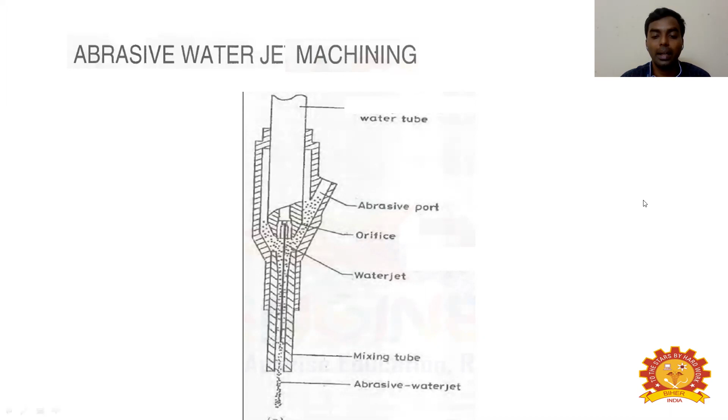The four important elements are: pumping system, abrasive feed system, abrasive jet nozzle, and catcher. These are the four important elements in abrasive water jet machining. Now we are going to study them one by one.

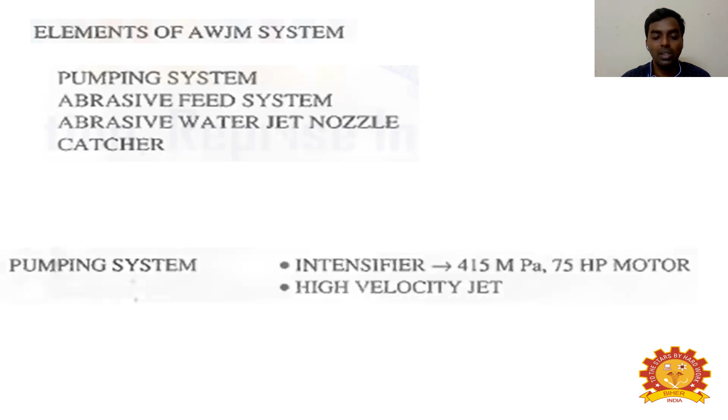The first one is the pumping system. The name itself indicates a pump, which we use to transfer fluid from one place to another.

It produces a high velocity water jet by pressurizing the water as high as 415 megapascal by means of an intensifier. To achieve such high pressure, 75 horsepower motors may be required. So water flow requirements up to 3 gallons per minute are quite common.

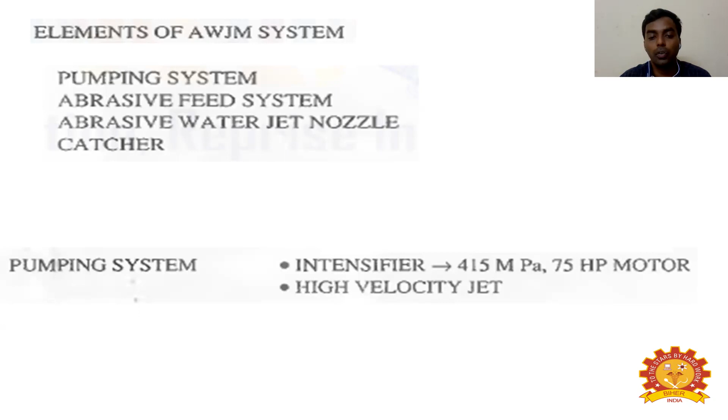Then the abrasive feed system. It must deliver a controlled flow of abrasive particles to the jet nozzle. The present abrasive feed system delivers a stream of dry abrasives to the nozzle.

The flow of the water jet in a mixing tube creates enough suction for the flow of the abrasive. The flow rate of abrasive can be controlled by changing the diameter of the control orifice. Such systems have the limitation that they cannot supply the abrasive over a long distance.

To overcome this drawback, researchers are developing a system in which it is possible to directly use slurry instead of mixing it in the nozzle. This system would make it possible to supply slurry over a long distance. However, it would require more power than the dry abrasive feed system.

Highly pressurized water is passed through a nozzle of diameter ranging from 0.075 to 0.635 mm to obtain the desired velocity of 700 meters per second of the abrasive water jet mixture. For long life, the nozzle needs to be made of sapphire, with a life of about 250 to 500 hours.

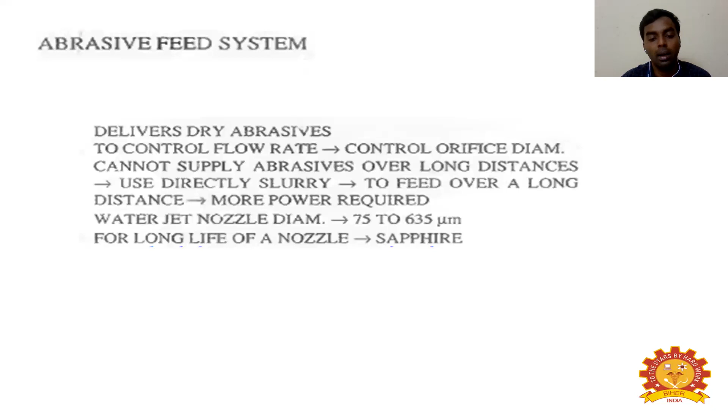The next element is the abrasive water jet nozzle. It performs two functions.

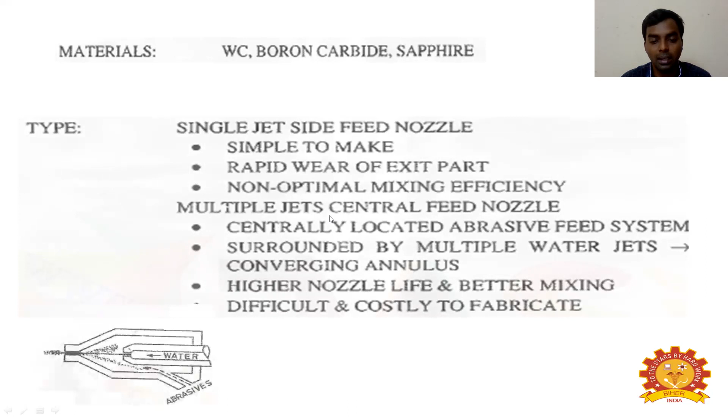The first function is mixing of the abrasive and water to form a high velocity water abrasive jet. So those are the two functions: mixing of abrasive and water to form a high velocity abrasive jet.

It should give a coherent and focused abrasive stream at exit from the nozzle, which is made up of sapphire, tungsten carbide, and boron carbide.

The internal details and two kinds of abrasive jet nozzles are shown in the diagram. There are two abrasive jet nozzles used in abrasive water jet machining: the single jet side feed nozzle and the multiple jet feed nozzle.

In a single jet side feed nozzle, abrasive fed from the side mixes with the water jet in the mixing chamber. The nozzle is less expensive and simple to make, but does not provide optimal mixing efficiency, and it experiences rapid wear at the exit part of the nozzle.

The multiple jet center feed nozzle consists of a centrally located abrasive feed system surrounded by multiple water jets, which are arranged such that a converging annulus of water is produced. It gives higher nozzle life and better mixing of abrasives into the water jet. However, it is very difficult and costly to fabricate such nozzles because of the angle of convergence.

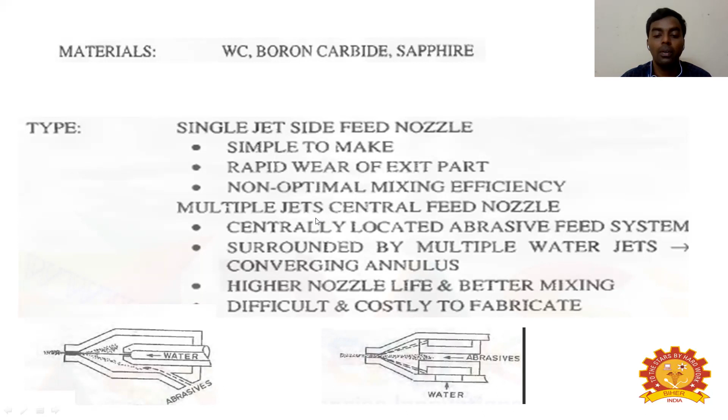The next important element in the abrasive water jet machine is the catcher. This element is used when the nozzle remains stationary and the workpiece moves. The catcher is a long narrow tube placed under the point of cut to capture the used jet. In the case when the workpiece remains stationary and the nozzle moves, a water-filled settling tank is placed directly underneath the workpiece.

High pressure water from the pump is transmitted to the nozzle by a high pressure flexible hose. When using the flexible hose, the pressure is less than 124 megapascal, and if the pressure is higher than 124 megapascal, we use rigid tubing.

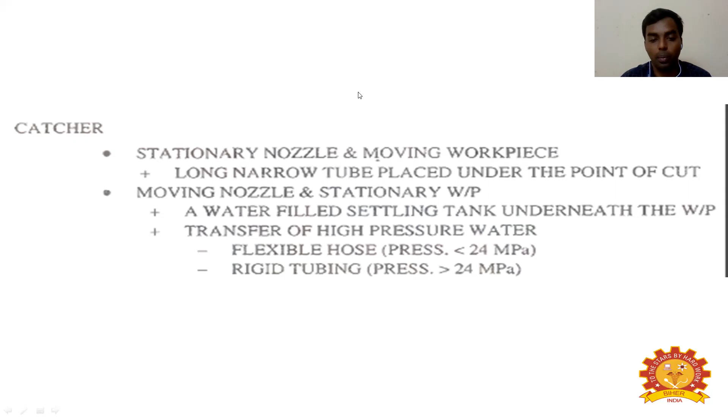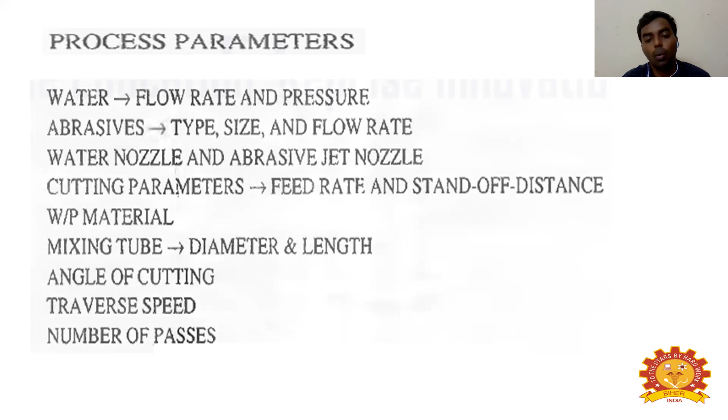So the next topic is the process variables, the process parameters. These include the water flow rate and pressure, abrasives and the water nozzle and abrasive cutting parameters, workpiece material, mixing tube, angle of cutting, traverse speed, and number of passes. The process parameters play a vital role in the machining process of abrasive jet or abrasive water jet machining. Now we will see them one by one.

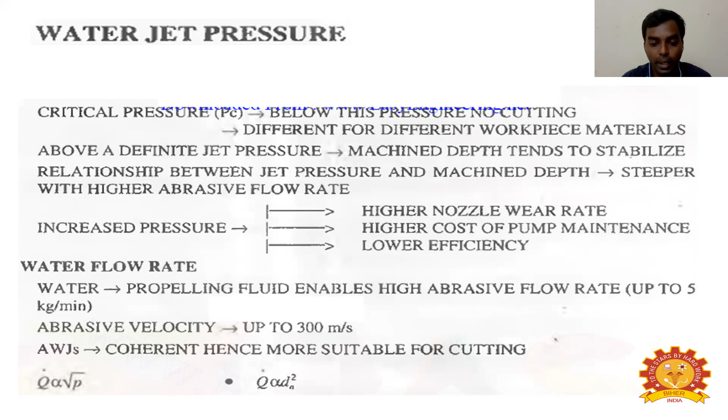Water jet pressure during slotting: the relationship between pressure and the depth of cut for different abrasive flow rates and nozzle diameters. In the next diagram we study the comparison. It shows the effect of water jet pressure on the depth of cut for various abrasive flow rates, and the right-hand side diagram shows the relation between the depth of cut and the water jet pressure for two different nozzle diameters.

There is a minimum pressure, called the critical pressure or threshold pressure, below which no machining would take place. This critical pressure exists because a minimum abrasive particle velocity is required to cut a particular material, and it is obviously different for different workpiece materials.

The machined depth tends to stabilize beyond a certain value of water jet pressure. The machined depth versus pressure relationship becomes steeper as the abrasive flow rate increases, as you can see in the diagram. As seen, an increase in pressure also increases the rate of nozzle wear and cost of pump maintenance, and lowers the volumetric efficiency.

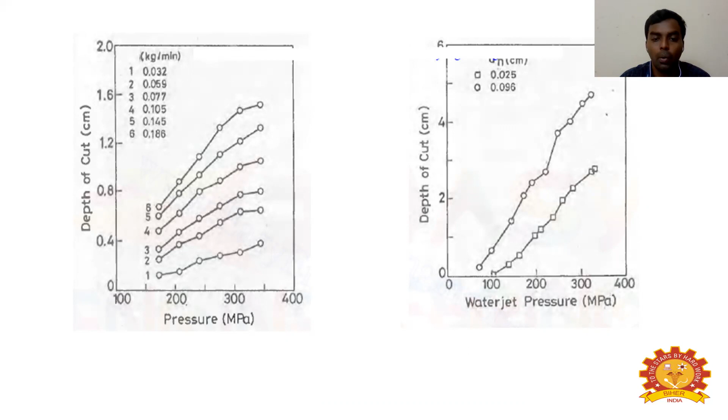Regarding water flow rate: in abrasive jet machining, where gas is used as a propelling fluid, only a small mass flow rate of abrasives, up to 100 grams per minute, can be achieved. In abrasive water jet machining, water is used as the propelling fluid, which enables a high abrasive flow rate to be achieved and makes it possible to accelerate abrasive particles to high velocities over 300 meters per second. Abrasive water jets are more suitable for cutting compared to gas abrasive jets because they are more coherent. The water flow rate is proportional to the square root of pressure and the square of the diameter of the nozzle.

Now we study the abrasive flow rate. The machined depth is proportional to the abrasive flow rate and the square of the particle velocity, where m is the abrasive flow rate and Vp is the particle velocity. However, an increase in abrasive flow rate beyond a critical value could reduce machined depth, because increasing abrasive flow rate enhances the wear rate of mixing nozzles and reduces mixing efficiency inside abrasive water jet nozzles. The relationship between abrasive flow rate and depth of cut is shown in the diagram graph.

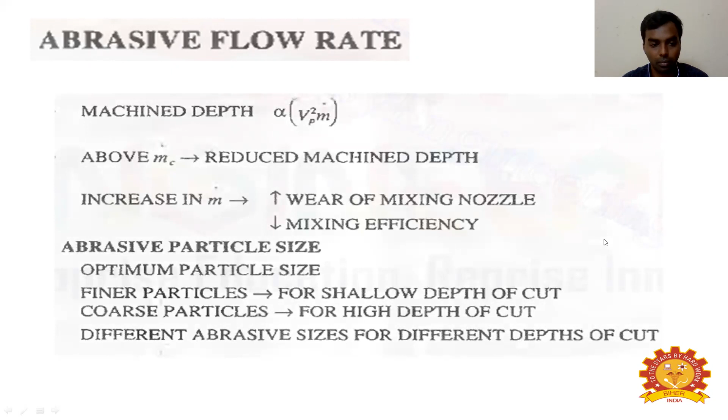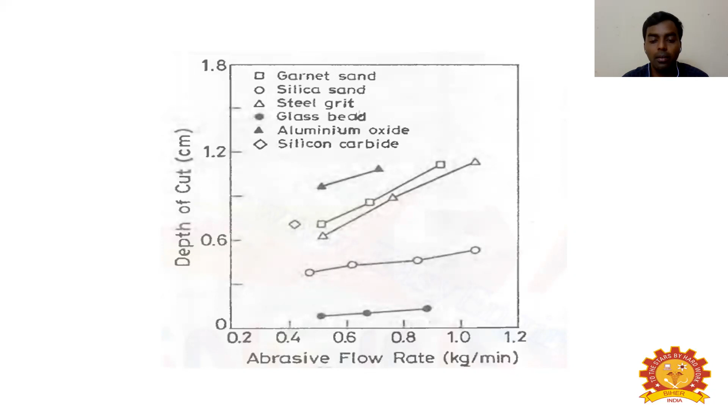So this is the comparison. Recently, efforts have been made to quantify the effect of abrasive particle size on depth of cut. Research has shown that an optimum particle size range exists for cutting different types of material. Mesh size 60 is more effective for relatively shallow depth of cut obtained with 2 passes. During machining of stainless steel, this was studied, and the approximate diameter of abrasive grit, S, can be obtained from the different equations we have studied.

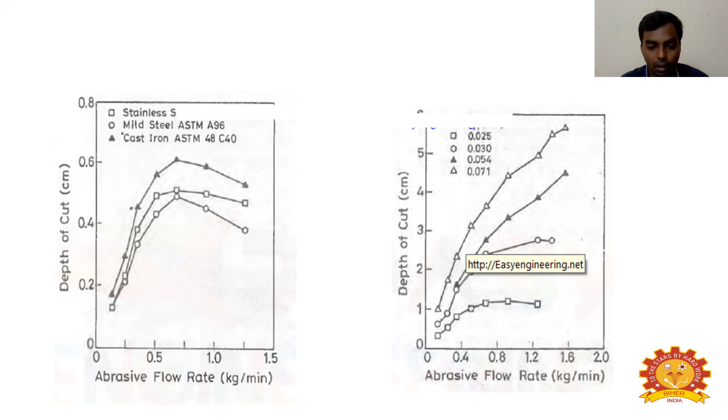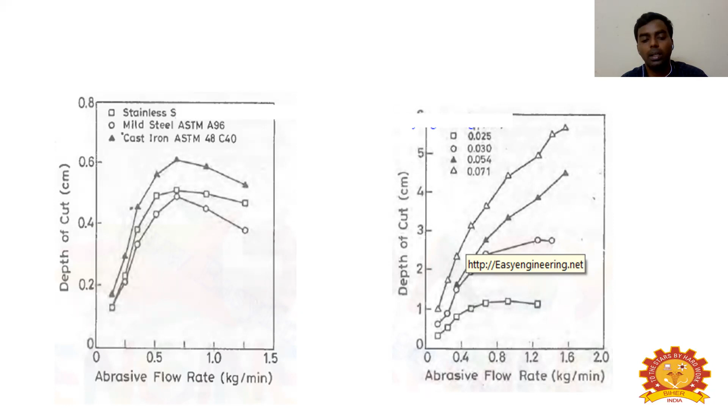So this is the abrasive material. Next, abrasive materials we are using: garnet, silica, and silicon carbide are commonly used in abrasive water jet machining. The type of abrasive to be used is determined after knowing the hardness of the workpiece material. Higher the hardness of the workpiece material, harder should be the abrasive to be used. Complete recycling of the abrasives is not possible here. The machined depth is also affected by the abrasive feed. So while selecting the type of abrasive for a particular application, one should consider the cost, nozzle wear rate, environment constraints, the machining rate, and the strength of these particles.

So the cutting - here, this is the graph which tells about the abrasive flow rate and the depth of cut for different abrasive materials. Here we are using garnet sand, silica sand, steel grit, glass bead, aluminum oxide and silicon carbide. As I earlier mentioned, the higher the hardness of the abrasive materials used, the better.

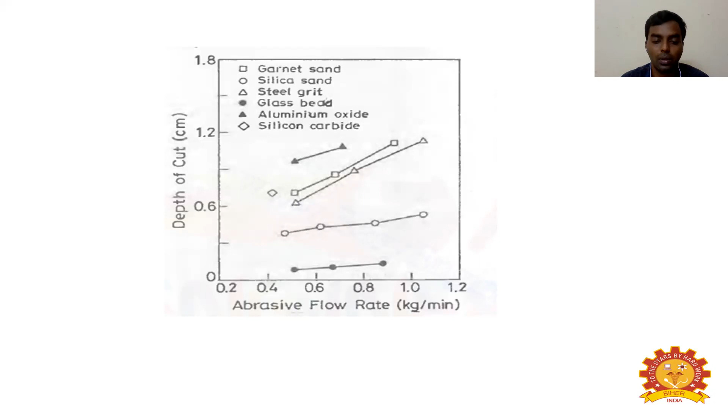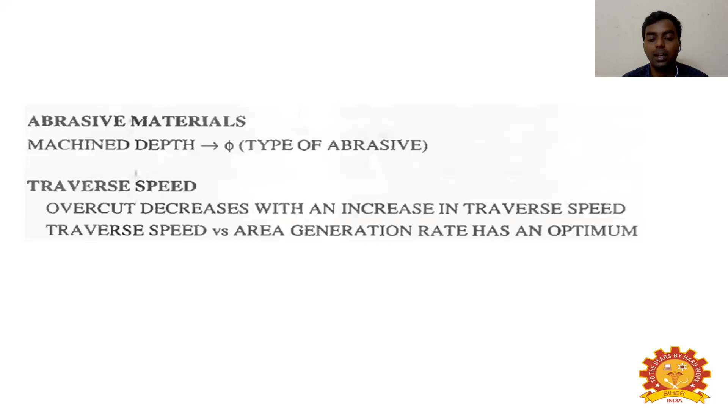Then the next parameter is the cutting parameter. In the cutting parameter, the first one is the traverse speed. What is traverse speed? At decrease in traverse rate, the depth of cut increases. However, if one goes below a minimum critical traverse rate, there would be hardly any increase in the depth of cut. Here is the diagram.

So this is the traverse rate. This diagram shows the optimum traverse rate that exists for generation of maximum cut area. What is the maximum cut area? It's the product of the traverse rate and the depth of cut. However, in case of mild steel, the rate of cut area generation decreases with an increase in traverse speed beyond the optimum value.

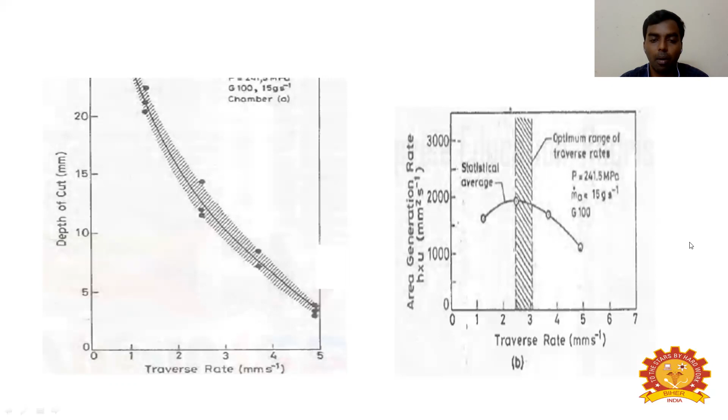Then the next important parameter: the number of passes and standoff distance. For number of passes, multiple passes can be employed in two different ways, as we already studied in the introduction: a single water jet with multiple passes, and multiple tandem jets with a single pass. In case of a single water jet, the whole power and quantity of abrasives are used by a single jet, while in the second case, both the available power and the abrasives are divided among the multiple jets. The distribution of power and abrasives among them is considered for overall optimization.

Multiple pass cutting requires special catching and contaminant precautions because the initial pass cutting results in a jet backflow. Here, in this diagram, we can see the relationship between the number of passes and the cumulative depth of cut. It is also evident that as the number of passes increases, the slope of the curve also increases. This increase in slope has been attributed to the fact that the kerf acts as a local mixing chamber that tends to focus the abrasive jet stream for more effective cutting.

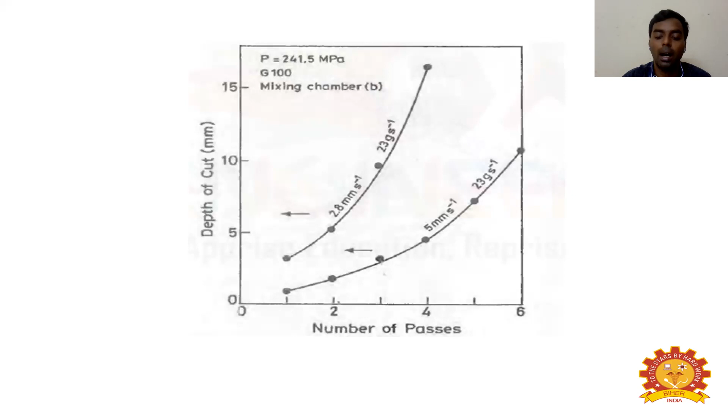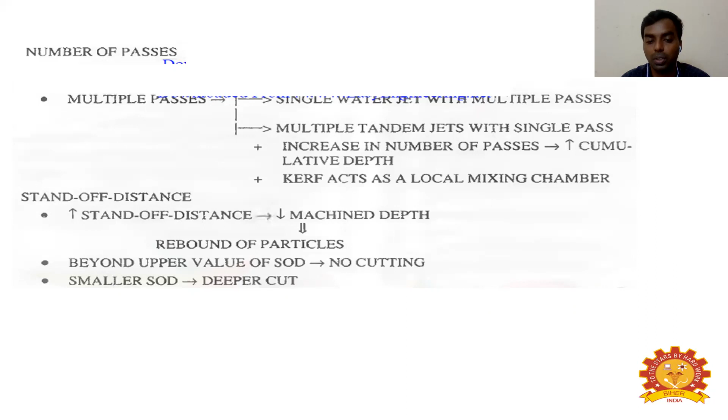Here, the greater the cumulative depth, the lower the traverse rate, due to the effect of standoff distance and kerf friction drag. So standoff distance is the next important parameter. What is standoff distance? It is the distance between the nozzle and the workpiece. Increase in the standoff distance rapidly decreases machining depth. This can be explained by arguing that the liquid phase of the jet breaks up into droplets, resulting in free abrasive particles.

The diagram indicates that these free abrasive particles rebound upon impact, which leads to shallower penetration. There is an upper value of standoff distance beyond which the process will no longer perform cutting. However, in case of multi-pass cutting, the kerf made in the earlier passes helps the jet remain intact. So it is concluded that the smaller the standoff distance, the deeper the cut. From the diagram we can find this.

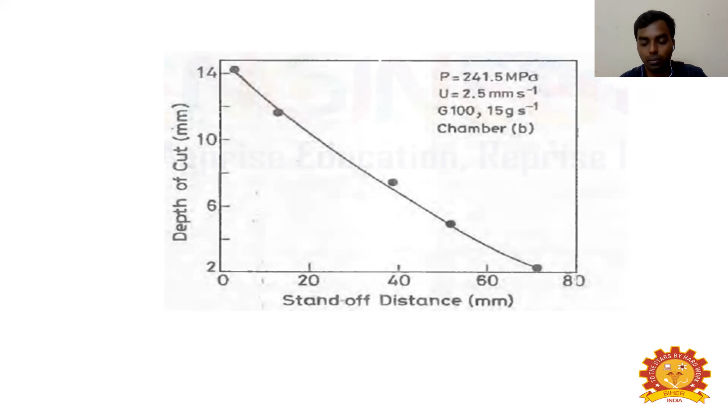The next parameter is visual examination. Visual examination of the process was conducted on stained lucite and glass work materials with the help of a movie camera and a special configuration camera which have been used for the visual examination.

The mechanism of material removal has been attributed to two modes: cutting wear mode that occurs at shallow angles of impact, and the deformation wear mode which occurs in the lower part of the cut at larger angles of impact.

It is found that a number of steps are formed below the steady state phase at the top. The step formation takes place as the jet traverses over the workpiece, and the size of the step increases with the increase in machined depth.

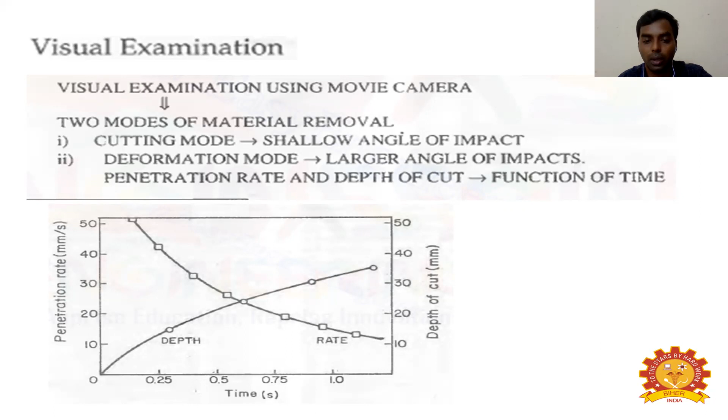So these are the important parameters which should be considered in abrasive water jet machining. This was studied and the results were found out.

Next, we are going to study about the process capability or process performance. Abrasive water jet machining has been used to cut even thick material, up to the range of 200 mm, with a narrow kerf.

The width of the kerf depends upon the workpiece hardness. For hard material, the kerf narrows down towards the bottom, while the reverse is true in case of a soft material. Machined surfaces have not revealed the presence of any thermal or mechanical damage to them, which is very important.

Now the applications, very important - without the application, we don't have any process. This process has been employed to cut a wide range of materials, including metals, especially copper and its alloys, lead, tungsten carbide, aluminum, etc., and non-metals like graphite, silica, glass, acrylic, concrete, etc.